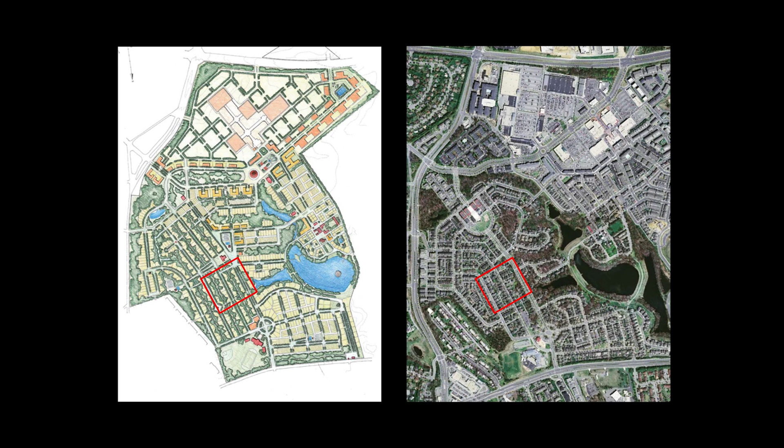In some of the areas, one in particular I'll point to, there was the need from the original plan to connect a street between some blocks here, but up a challenging slope. Where the plan had originally proposed this as a street, the city came in and said it would be much too steep to build that as a street. We said do it as a pedestrian path instead, which at the time was frowned upon for a number of reasons.

First, they raised the question about who would want to live in a house that doesn't face a street. Well, you know, we had an excellent story shared with us this morning about just how wonderful that can be.

In this case, we did persuade one of the builders to put this proposal in their sales office just for a weekend to kind of gauge reaction to something like this. And they took holds on 6 out of the 8 lots in 48 hours. And we were in the developer's office the next Monday morning adding 2 more groups like this to the neighborhood.

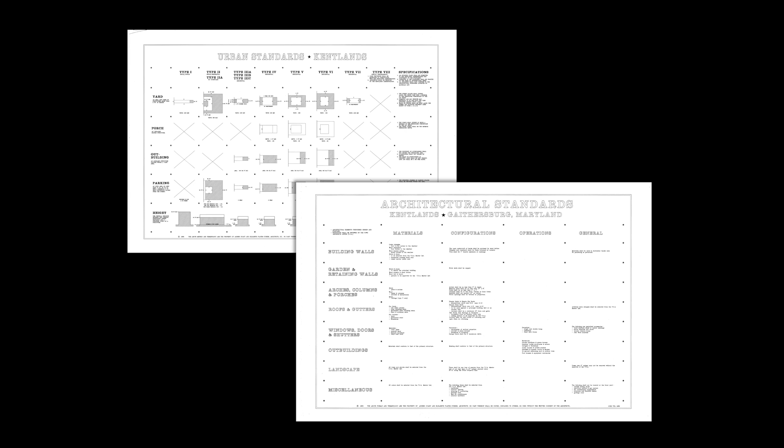So that kind of refinement was taking place all within the context of some design standards. As we heard this morning, sometimes we're looking for rules to kind of shape or guide these places. We had a very simple set of design standards based really largely on the Seaside standards that produced a place that looks like this.

The example I'll point to is this piece from their original plan, which was the first phase. We learned the importance of really refining the first phase carefully to be able to share with people that, in fact, you're being deliberate about the design of community here.

You'll notice one of the changes was from the straight street that went across with houses with their sides along the major road, to fronting houses on the major road and then pushing that street in to create space. This was the original sales office in this location.

So the salesperson could step out into a space shaped by these houses. And then we bent the street just slightly, placing a house with a tower here and then continuing down to the town center. They built every type that they were offering in the community, large houses all the way to mixed-use buildings from beginning to end of the first street, so you could really get a sense of what that place might be like eventually.

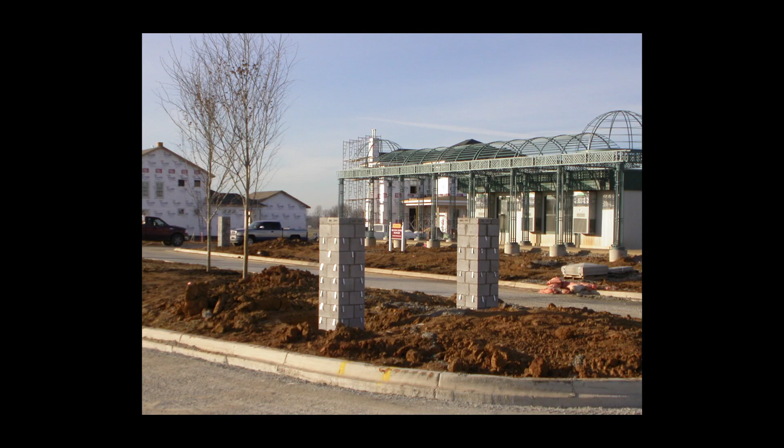There's just some shots now of this street under construction. Here's the house with the tower and the variety of types. One of the things done to increase the variety was to build 3 identical houses next to each other. That took a little persuasion, but one builder was willing to do that and it worked out just fine.

Here's what that street looks like finished, but before the trees. But one thing this founder has done really well from the beginning is curating those kinds of events that Bob was talking about in his community.

This is one of the first ones, where the deli operator asked if he could just come out and close the street, and the town founder got behind them to enable that, to have an event out there and start attracting people. It was very easy when they did that to sell community, in fact.

Promoting those kinds of events was the best form of advertising that they pursued. We also refined some of the rules that the builders were asked to follow in terms of what they could do on their lots and so forth.

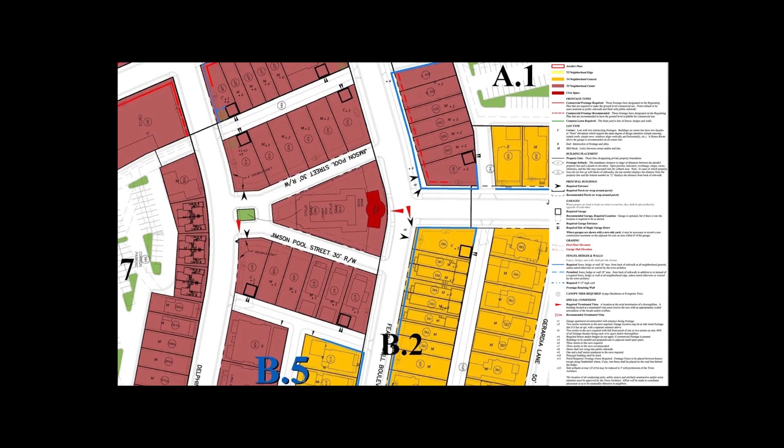Oh, and one more - the large events are now hosted in their outdoor amphitheater.

This is where you take over.

Hi everyone, my name's again Brian O'Looney from Torti Gallas & Partners. I come from a very interesting firm. At the moment we work the full range of construction, from single-family residential to high-rise construction.

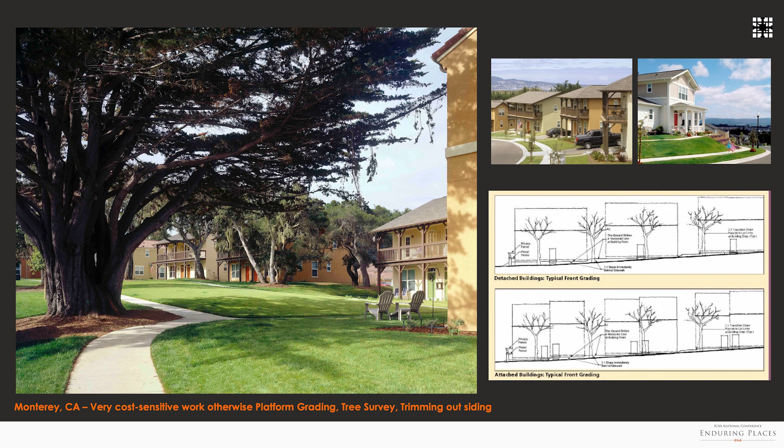So this is one of my partner's projects, Monterey - this is single-family military production housing out on the West Coast that was built at the time for $50 a foot.

So we work at all these scales, and we're working at a very tight price point for our projects. I put this slide up just to show that the main focus of our clients is to keep the dollars in line.

And what we're going to talk about today is primarily at the lower end of this spectrum. This is one project, when I was at David Schwarz's office, we worked on, which is taking the neighborhood center program - i.e. the supermarket-anchored strip center - and finding a way of doing it differently. Each of these panel members have done this in a very creative way, and so we're going to talk about that in a little bit.

I moved to Torti Gallas, and we did a lot of mixed-use buildings, residential over retail, all at a very tight price point. These buildings, except for the brick facade, are all styrofoam, all EIFS. The windows, in order to make this project cost-effective, every window in that building is the same. That was a way to get that building to price out.

I want to go back. What we try to do in our work is at very humble fees, come up with architecture that contributes to place, compared to what you'll see on the left, which is sort of the example of the warranty schedule from James Hardie driving the facade design in many ways. We try to figure a way to use the same materials, keep to the warranties, but not have that be the way that the building's result forces the design of the multifamily.

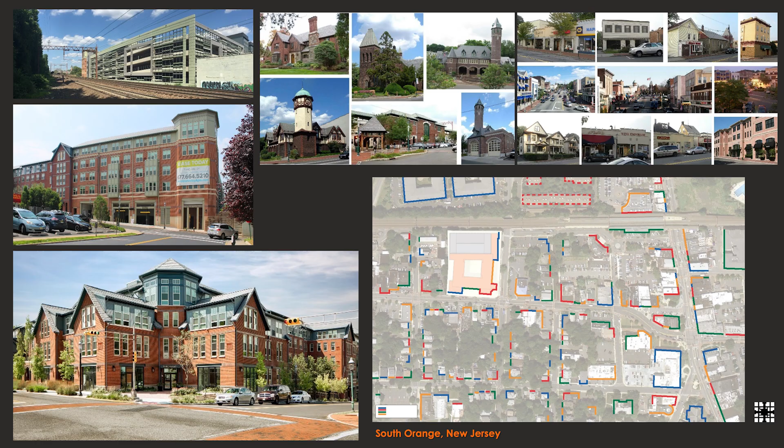We try with these larger buildings—and that's where my main career is focused these days—on these Type 3 and Type 5 buildings, which are wood over occasionally concrete, but also just wood multifamily, typically the most cost-effective way to build housing. We try to find ways of breaking down these larger buildings so they fit into their community. So this one here is in South Orange, New Jersey. You can see this is the context of South Orange.

We used a couple devices in the design of this building, mainly brought an octagonal tower, like Mike did at Norton, that related to a lot of the octagonal towers in their town, broke down the facade and the massing. This is a 5-story building, but it looks like 2 on the outside. We played some tricks to achieve that by having long fingers come off the building that step down to hide the mass.

And then we look at the increment of the town, the facades—these are every different facade identity—and try to get our building to come down to a scale in a way that fits into that community.

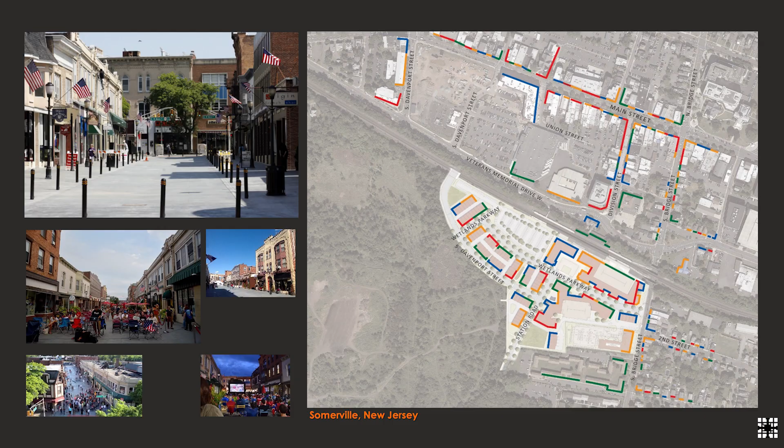We did the same thing in the place just up the road in Somerville, New Jersey. Very similar—this one had a train station. This was a suburban parking lot. We incorporated the train station into the building.

This is one Type 5 Texas donut designed to look like multiple buildings coming around a civic plaza. The train station entrance is here, and the city put their borough meeting hall in that part. This just opened a couple weeks ago. This is, again, at a very lean price point—well under $200 a foot, if not at $175 to build.

We're now going to get into the questions for the panel.

The first question is just talking about the value of a plan, and I think this question should be really addressed to the developers and the team, because you could have gone out there and worked the conventional method, but you both took the step to not only have a plan, to pay for a plan up front, but also pay for some of the coding and the pattern book work. So I'd like to hear a little bit about what made you make those decisions on the projects—to take that leap of faith, to understand what that could achieve for you.

I'll start. For us, it is a matter of—much like the majority of the people in this room, I'm sure—the idea of quality and being able to start from the perspective that what you're going to do is going to be high quality and is going to be the best. That's putting together a team of consultants that you have trust in and that you know are going to be able to deliver.

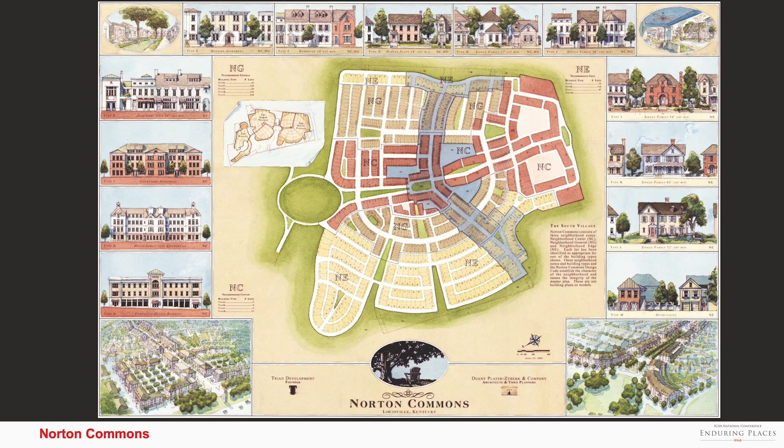In response to the first question, if I may, as the designer on the panel, I think a good plan is essential to start with, and developers should be prepared to pay a lot of money for those plans. With regard to the code and how it evolves over time, what I've found is as the design standards become more refined, they should become lighter, because your vision for the place becomes more and more clarified.

So that design code could become much lighter. I'm going to offer a code you're all welcome to implement free of charge, if you like. It's one sentence long: out the front door, you do as you're told; out the back door, you do as you please. With that in mind and a clear vision, you can end up with an excellent public realm and virtually complete freedom out back at the same time.

Would you switch back to the last plan and I'll answer the second question, if I may? Sure, thanks. So this is the plan for Norton Commons, which is zoned. In this case, this was very early on in the days of the use of the term 'transect,' so this still uses the older terminology: neighborhood center, neighborhood general, and neighborhood edge.

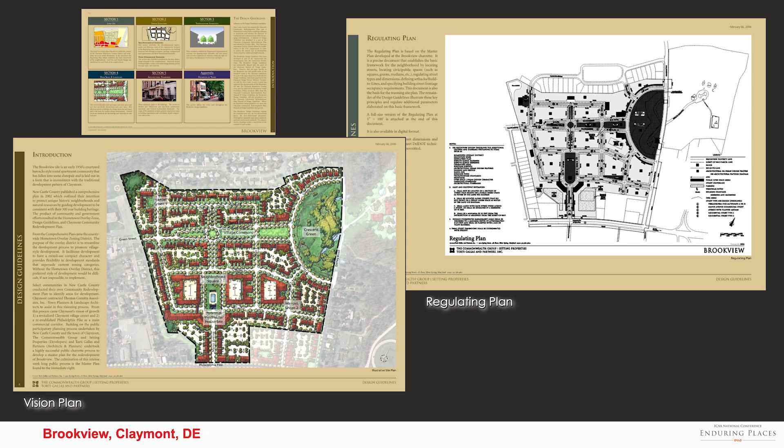The way these standards were written is such that those zones actually overlap. They're parametric, and the range of possibilities with each zone overlaps with the zone next to it. So anything you could do in neighborhood general, you could do in the neighborhood center or neighborhood edge to a certain degree. But what you can't do is, say, put the single family house from the neighborhood edge into the neighborhood center, or the business that belongs to the neighborhood center at the neighborhood edge. That's the way variety and flexibility was permitted in the plan in terms of which type goes where.

So I'm going to ask a question about that plan. At Norton Commons, the buildings that line Meeting Street, Linear Green, were originally envisioned as live-work units. You can see that in the plan there. But in the end, that got built as something different. So talk us through that process and how you managed to maintain the incremental feel along Meeting Street.

Okay, so there's a longer answer to this, because this street actually wasn't in the original plan. This street came later — that's an earlier drawing of it. That's right, yeah.

At the bottom of the image, just out of frame, is I-71, and that particular site had various potential uses. At one time it was an expansion for a nearby hospital. It wound up being an office park in one iteration, and eventually became multifamily housing across the bottom to seal off the interstate. As the uses became more intense and more mixed use, a decision was made to connect a street from that degree of density and intensity back to the main square. So that's the addition of the square that you see.

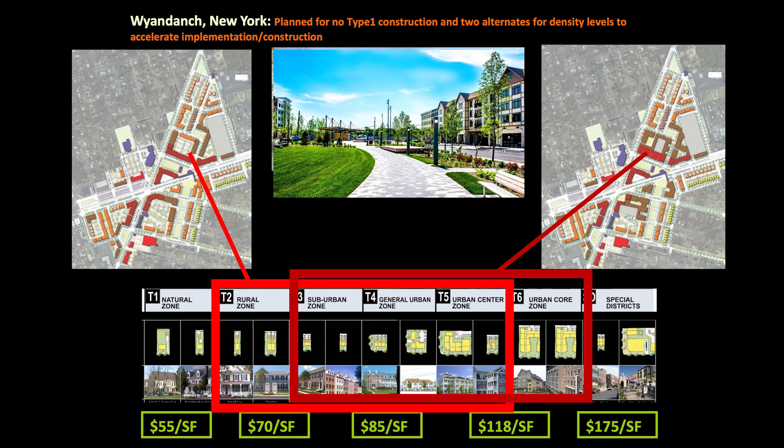Initially, it was thought that it might be live-work units along there to continue the commercial feel from the square down to that density. But somebody came in and wanted to do subsidized senior housing, which everyone thought would be a great addition to the plan, a way to expand the range of residential types in the neighborhood. So essentially, the property lines were erased, but the urban form — the street, its location, where the parking was placed, and so forth — stayed the same. It was really just a switch to a different building type and a slightly different form for the use.

All right, well, let's talk about tenure a little bit. These are projects, I believe, that started as one tenure and went to another — so it went from rental to condo, or condo to rental. Bob, you want to talk about that a little bit?

Yeah, up on the right, upper left corner — those are what we call flats, but those were condominiums, and at the time when the market was strong for that, that's what we were doing. Then, as those slipped away, we got into apartments, which is on the lower right corner. We switched over to apartments, but the block structure was exactly the same, working off that 18-foot grid. Again, it's that flexibility of building into the plan, the ability to do it. So we have, in probably four blocks of the neighborhood, a complete transect from single family all the way up to multifamily apartments at a higher density.

So, have you found that there was a challenge with folks not wanting rental uses within the neighborhood or within the plan? Have you had that challenge? Oh, yeah. I would always start with that if it's an opportunity.

It's always the case that if you had a veil you could lay over the entire building, build it, and then pull it back, everybody would just see it and it was fine. So of course we had plenty of comments when we went to the higher density, and then the idea of even being rentals instead of ownership. But then it just died down.

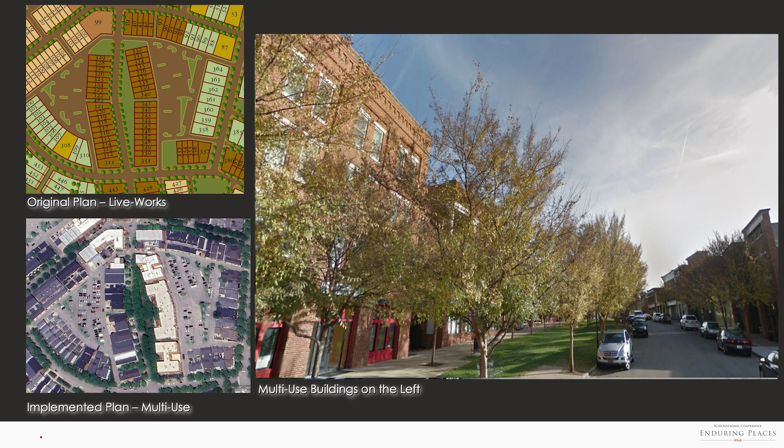These are a little bit garden-style apartments. We were working with the developer, we had a budget, and we tried to take his buildings and simplify them as best we could to fit on a street grid with parallel parking. But it happens — it's because of bad planning and bad design in the past that people point to us; when they think of apartments, they think of this instead of that. And these actually became rented up by many residents who were scaling down, and other things, so it worked out fine.

So part of our task here is to talk about getting the vertical design right, getting the architecture to contribute to plans done well, and in this case, at a market price point. So, is it possible to code the vertical? Where does coding break down and become too vague or too prescriptive? I have an example from the Morristown form-based code above, which tries — its best example is with the townhouse — and then below that, there's another example. This is from Clarksburg.

This is in the area that we had worked on together, but then wasn't regulated, wasn't led by a town architect, and you can see the results for yourself. So the question is, what can we do to get the vertical architecture better? What processes work better? The next couple slides are going to deal with this question.

I think doing a better job educating architects would be a good place to start. Yeah, I mean, with good designers, with good architects working in these communities, you wouldn't need a code. The basic rules could be laid out. One of the simplest codes...

is one Andres, who I just saw a moment ago, actually brought to my attention for Old Town Alexandria, the Carlyle building there. Old Town was supposed to be Virginia's first town. The first guy, John Carlyle, starts building his big mansion here in this new town with a big green lawn around it. Sounds familiar, doesn't it?

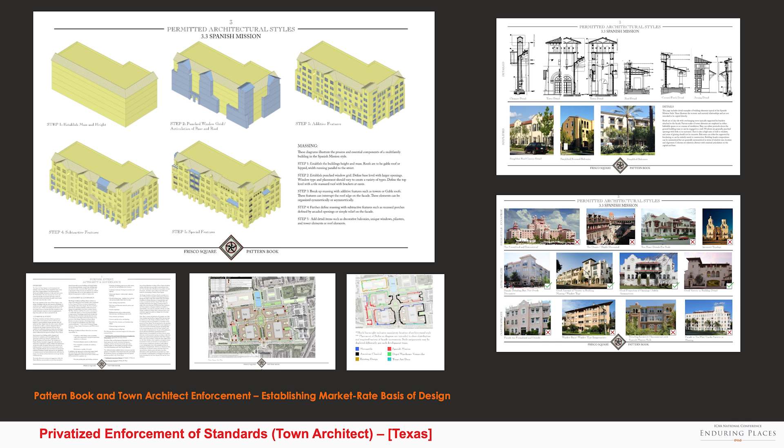So it's a challenge. This is a bit of our communication in the past, where we get a redline from Mike on a code we're working on together. What's interesting is it starts to talk about the different ways you can set up the process of regulating as things get built. In this case, you were arguing that the town architect shouldn't be relied on so much, that you could also have a committee, and I'd like to talk about what's better left to a community review board and what can be better regulated by a town architect, and when a community review board comes on board and becomes successful.

I should mention I had served on the community review board in counties where we both live. This particular project had unique beginnings because it grew out of a lawsuit, because of how the developer interpreted the code requirements for the county - they had gotten some things built that didn't actually comply, so residents were suing the developer. We were called in when the development team had a design consultant advising them, and the citizens decided they wanted a design consultant to advise them too. There was a whole conversation about how that should happen. We were asked to advise the residents in terms of what their expectations could realistically be in that situation.

There were a couple of firms under consideration to advise the developer going through this mediation process. And I called John Torti and said, what if we both agreed to serve these respective clients, but together? So they hire us jointly, and we give one set of recommendations back to the community, which seems to be the nature of mediation anyway - that's the way that process is supposed to happen. It turns out the judge liked the idea, and so we worked together to come up with it.

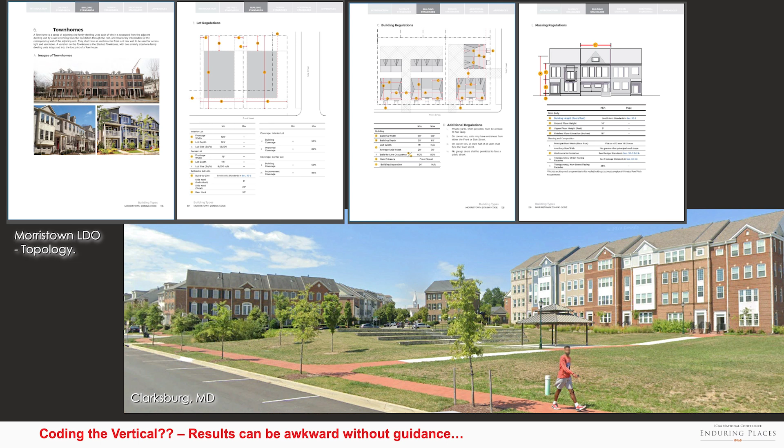And so they would not approve the overall PUD in the town unless this was in place. They've done this for a number of PUDs in Frisco, and other towns are starting to do this, where they require a private regulation realm done through a pattern book and town architect. That was the methodology chosen there. These are some of the buildings getting built, this is the main circle getting built. That's the plan. But again, the history of this led to those four methodologies.

I want to talk a little bit about that town architect role, because on the lower end of the scale, when you're working with builders, as you all do, you're not typically able to get that high-end architect. Seaside did for many of the homes, but typically you're working with a builder and whoever they have on their team. So one question I have is to describe key aspects of the process you've used to implement and achieve a higher level of craft with builders, and how you communicate the expectation of that craft to ensure conformance to the vision.

These are mock-ups we're able to use for those large buildings, but you're probably not able to do stuff like this in what you do.

So let's talk about that a little bit. Mike, what's your best tool to get builders to build well? Besides just saying, look at that house, that's how I want it.

Well, really sitting across the table from whoever's designing the building, ideally in the presence of their client. That's the best tool. It's time-consuming and expensive, but it's a great investment early on.

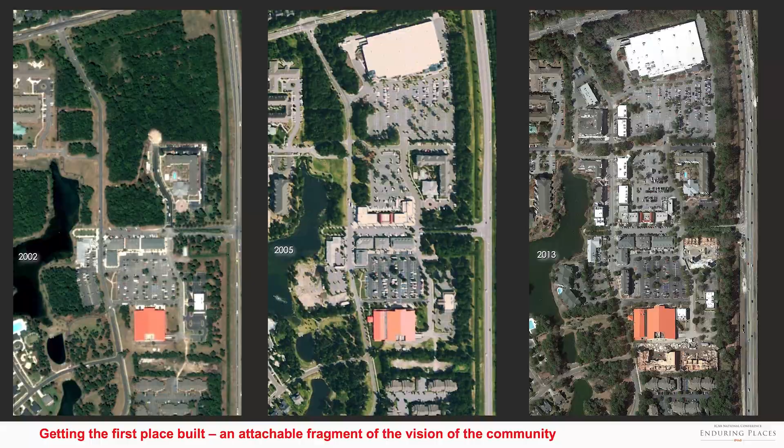That was a Piggly Wiggly, and now it's Harris Teeter, right? That's correct. So how did you get those grocers to play nice?

Part of it may just be the fact of who the operator was, in both Freshfields as well as Seaside. But more importantly, they understood they had a captive market there. At Kiawah Island, there was no other place to go and get groceries, so it made tremendous sense for that operator to be there. Same thing with Seaside Farms.

When Seaside Farms was originally developed, the town of Mount Pleasant was about 30,000 people, plus or minus. It is approaching 100,000 right now, so it has seen tremendous growth and has been able to fit in. Harris Teeter now is at Isle of Palms and has a store in one of our centers there, so that's taken some of the pressure off of this store at Seaside Farms. But more importantly, this becomes the heart of the neighborhood - a place where people can go. It doesn't matter if it's at Kiawah Island or some more traditional suburban location.

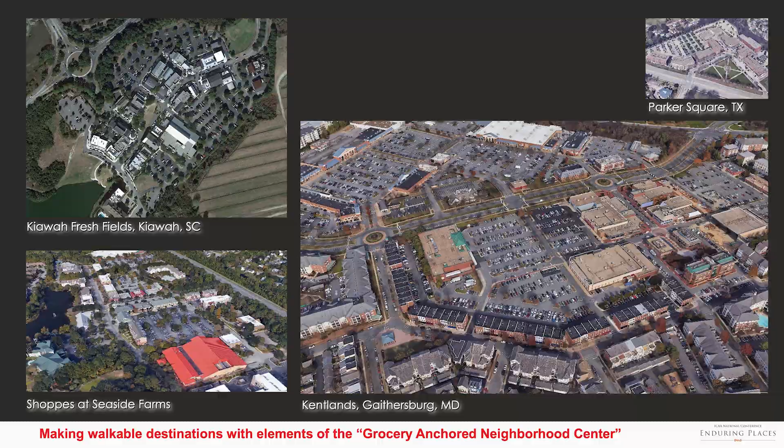It's the dream of every developer and every planner to have very successful ground floor retail, activated, with residential above. I can tell you it's probably one of the most difficult types of projects to execute on. We're required to do that in just about every location, and I can show you examples where we still have space that sits vacant because we simply can't fill the amount of space that a local municipality is going to require. So it is vital to the success of the project, more so from the standpoint of how that drives a prospective resident's desire to live there than the incremental revenue you're going to generate in rent. We take a very proactive approach, almost to the point where we're working hand in hand with the retailer or user of that space to make it economically viable for them to be there, because we know in the long run it's going to benefit our residents that live in the building.

Yeah, it's basically, the first one especially, the first corner pub or first third place, it's marketing dollars to get it going. You've got to get that going. It's what's going to set us apart. If you're selling town center and there's no town center, then what are you selling? So it's absolutely critical. And then what we found after we've matured and seen some businesses come in and go out, we've seen a lot of the pitfalls.

One, we've found that smaller spaces are much better. Start small, and if they can expand, have an expansion area they can move to. But just help them along with their business model too. A lot of these are people, it's a dream for them, but they don't have business sense. So you've got to help look at their business plan before they start, give them suggestions. You know the numbers, tell them what the reality is going to be, and hopefully they can make it work.

I think you need to be creative about what the third place is in the early days. It doesn't always have to be the coffee shop or the pub. They are challenging. I give the developers of Norton Commons, David Tomes and Charles Osborne, a lot of credit for doing a great job seeding the place with community opportunities. And one of the first things they did was to take an area of dirt that they weren't using yet behind some of their houses.